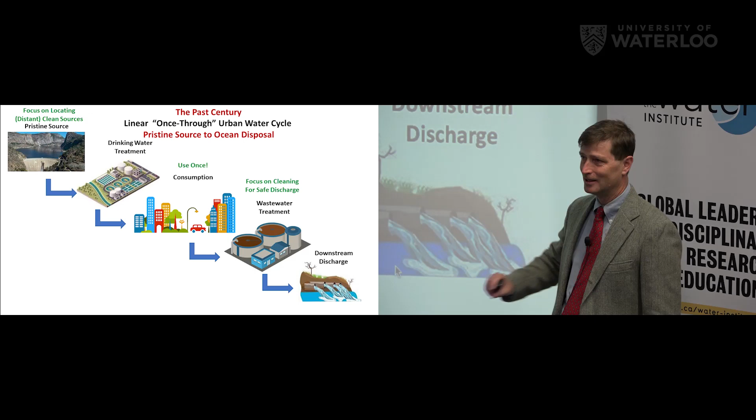Why do we need to change? Well, it turns out that this practice of importing water from distant sources is very energy intensive. On US average, it's about 0.3 kilowatt hours per cubic meter to move water from these sources to the drinking water treatment plant. The drinking water treatment process itself is very low on energy usage, and a lot of the additional energy goes into pumping this water through the distribution system out to people's houses. So actually the transport cost is what matters most, not so much the treatment cost.

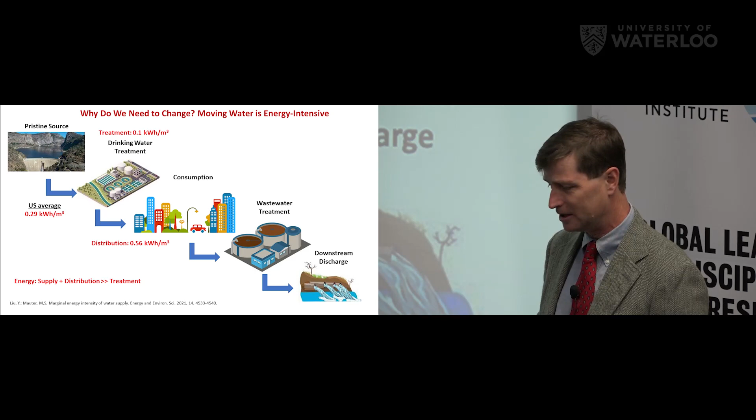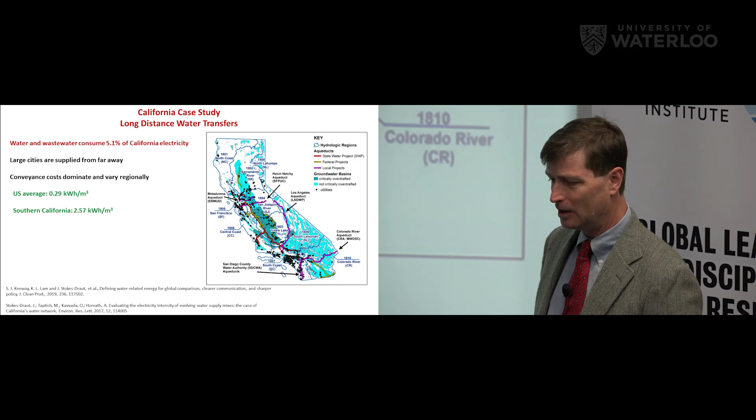Now that's on average, as I mentioned, about 0.3 kilowatt hours per cubic meter, but if we think about areas like California, it's much more extreme. Here is a map of California. About half the population in California lives down in the LA and San Diego area. And here we import water from very distant sources, shown here in these purple lines, bringing in water from the Owens River Valley, also the California Aqueduct, and the Colorado River Aqueduct. If we think about the average cost of bringing water to LA, it's about an order of magnitude higher. So pumping these waters down into the LA basin is very expensive.

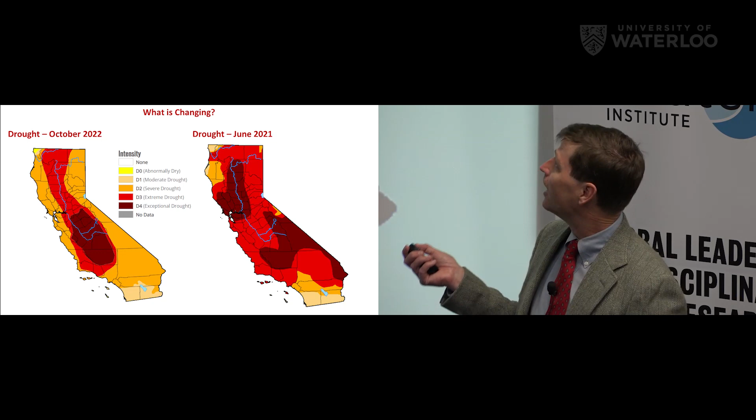What else is changing? Well, the climate's changing, and it used to be that drought was an abnormal happening. It's now routine. 7 of the past 10 years in California have been drought years. So at what point is that an exception rather than the rule? Just showing current practice, and last year you can see these areas of exceptional drought, these very dark blobs on the map. What are the consequences of that? Well, obviously, from a water supply perspective, there are consequences.

So there's impacts on water supply, but also other impacts throughout society. One is power, electrical power. A lot of our power in California comes from hydroelectric, so if your dam's not full, you're also not generating a lot of power.

And California is a big agricultural state, so a lot of the water in California is used for irrigating crops, and most of the interesting things grown in the US are grown in California - lettuce, tomatoes, that sort of thing, rather than just corn and soybeans.

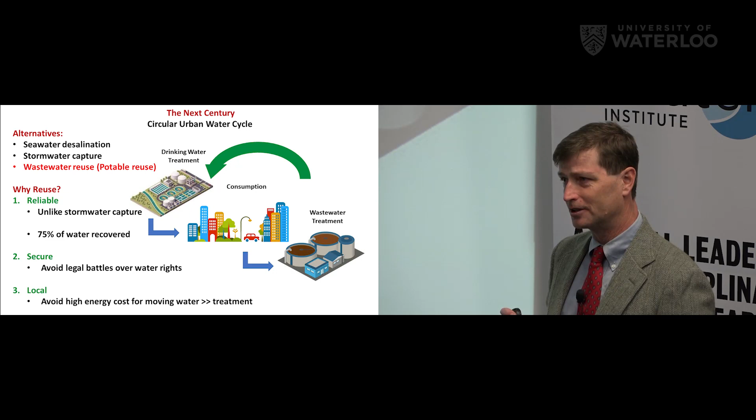So maybe instead of importing an unreliable source of pristine water long distances to get it to drinking water treatment plants, maybe we could reuse the water within the system. And so when we think about trying to expand water supplies, the press tends to focus on seawater desalination.

Some of the other options are stormwater capture - that means capturing the runoff that hits cities and cleaning it up as a water supply. But what I'm going to focus on today is wastewater reuse, and particularly potable reuse.

So why reuse? Well, there's a bunch of reasons. Number one, it's a reliable supply. Stormwater capture sounds good, but the whole reason we're thinking about these practices is because it's not raining anymore, so that's an unreliable supply.

And if we think about what goes on in a city, about 75% of the water that goes into a house ends up in the sewer. So it's about flow matched with what we need.

It's secure from a legal point of view. A lot of what goes on in California are fights between cities and states over who owns access to water. Well, this is your water - it's your sewage, so you have access to that water.

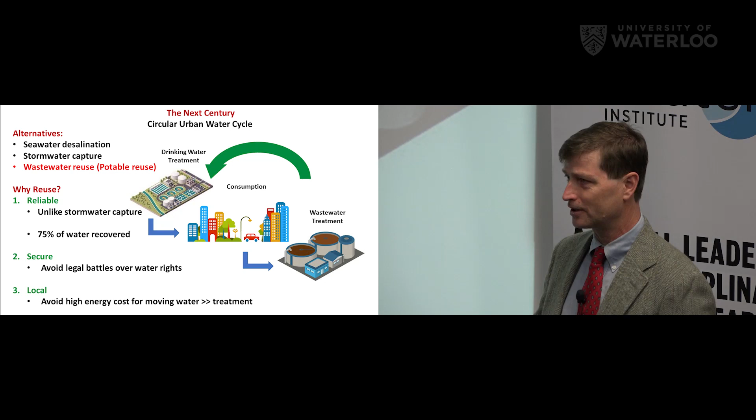And three, it's local. So again, hearkening back to the previous slides, the energy intensity of pumping water from distant sources - this water is already in your watershed or sewer shed.

There's also some win-win scenarios here. So for a variety of reasons, regulatory drivers are pushing wastewater treatment plants to put in additional treatment to remove things like nutrients to prevent eutrophication. And there's discussion now about adding removal of perfluorinated contaminants from municipal wastewater. So with these kind of drivers to put in additional treatment to the wastewater before you discharge it to an ecosystem, as long as you're doing that additional treatment, why not turn it into a water supply?

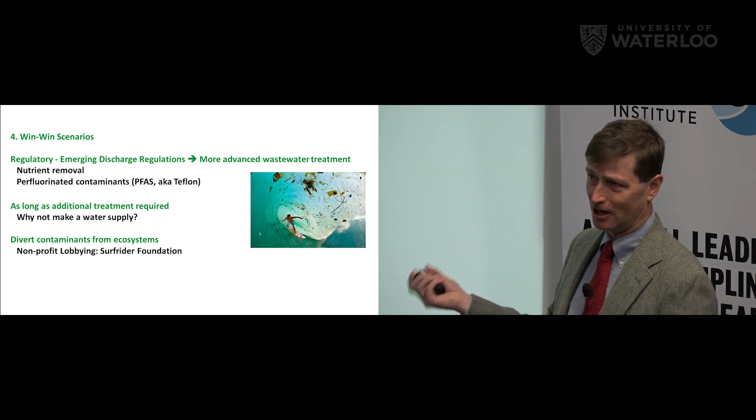And so here they're showing kind of garbage, but there are also concerns about pathogens and contaminants that they're surfing in, essentially. So diverting these contaminants away from discharge to receiving waters can be perceived as a win-win scenario, beyond just access to water, but also for enhancing the quality of ecosystems.

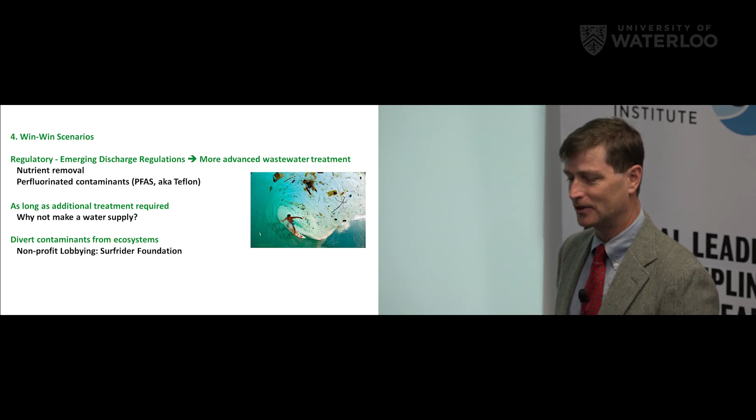So wastewater reuse is one thing. Why potable reuse? Why don't we just use it to irrigate things like golf courses rather than turning it into a drinking water supply? And so we do have non-potable reuse systems throughout California.

They typically paint the pipes purple to alert people that it's not drinking water quality, so we often refer to it as purple pipe systems. But the challenge is you need a separate distribution system, these purple pipes, and that's very expensive to install.

That's putting pipes in the ground, digging up streets - it's millions of dollars a mile. And so that can dwarf the cost of the additional treatment required to convert this low quality water into a drinking water supply. So why not go all the way to a drinking water supply where you gain flexibility in terms of the use?

So they do have these distribution systems, but they tend to cart the water out to high volume users - golf courses, nurseries, and that sort of thing. To expand beyond this to, say, pipe out to people's houses for irrigating their lawns becomes much more expensive than it's worth.

So what's the central challenge? If we go for converting this wastewater supply, wastewater source into a drinking water supply, what's the central challenge? The central challenge is all the contaminants.

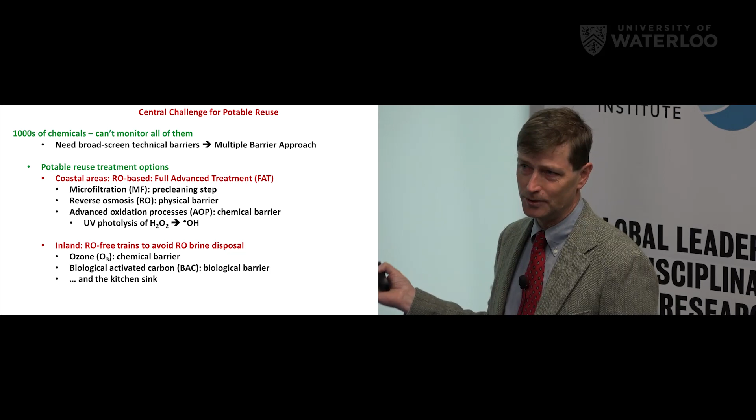The heart of the process is reverse osmosis, a broad screen physical filtration barrier that ideally squeezes out everything but the water. Some things slip through, and so we follow it with something called an advanced oxidation process that basically generates radicals that ideally go after anything that could conceivably slip through the membrane. Typically it's ultraviolet photolysis of hydrogen peroxide to make this radical.

In inland areas like Colorado, Arizona, those sorts of areas, they try to avoid reverse osmosis because part of the challenge is everything that's squeezed out of the water has to go someplace. Disposing of those salts and contaminants in inland areas is problematic. Are you going to dump it in the river? Then it's going to float downstream to the next user.

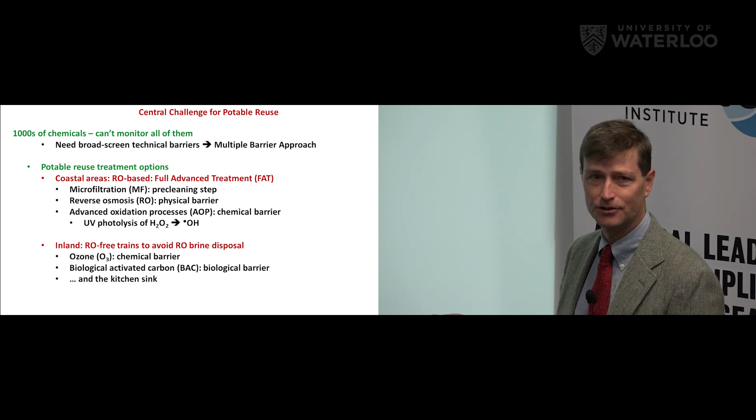So instead, they try to avoid these membrane-based systems and use other barriers, such as ozone, kind of a broad screen chemical barrier, followed by biological activated carbon. So hopefully the microorganisms are eating whatever's left in that water.

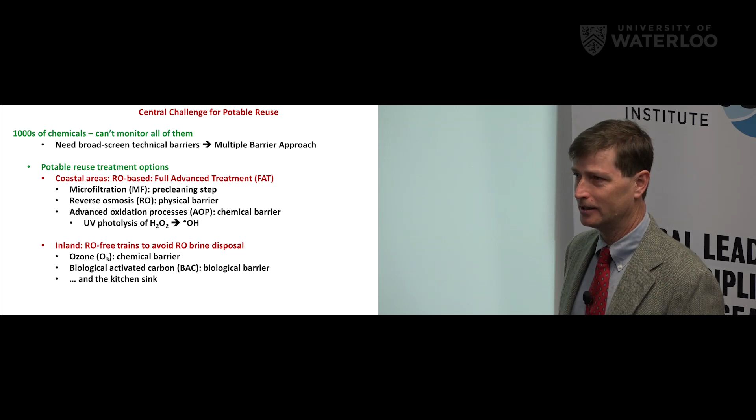But I put down here 'and the kitchen sink,' because one of the first of these types of systems is actually in Namibia in southern Africa in the 60s. It's an inland area, and one of the challenges they had is that it's a desert, so evaporation far exceeds the rainfall. So they started mining the sewage essentially as a water supply.

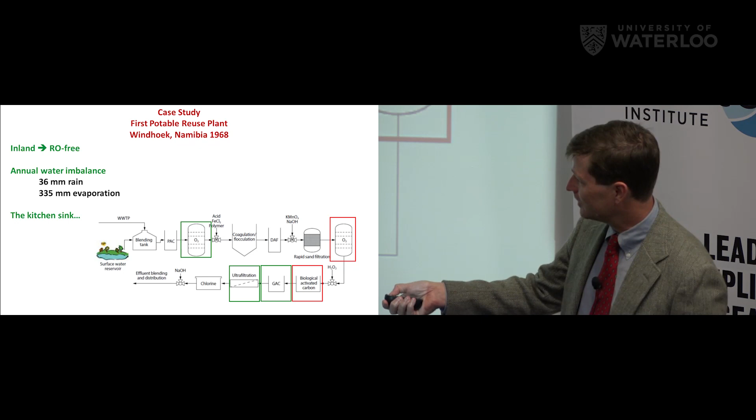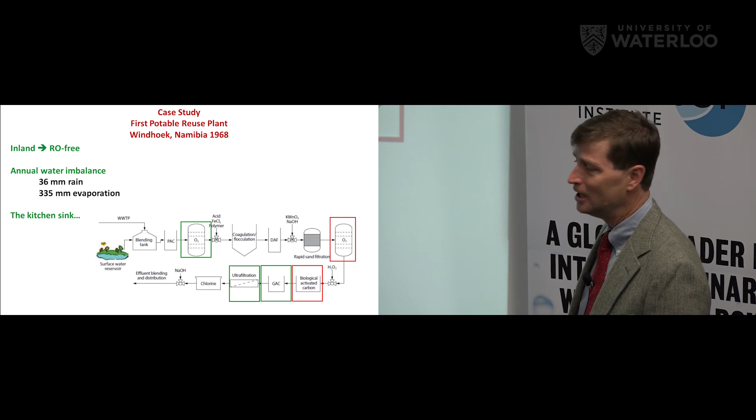So indeed, here you have some surface water, but they're blending it with wastewater, and it goes through this treatment train. You see the essence of what these inland areas in the US use: ozone and biological activated carbon. But they tack on many other treatment processes to hopefully knock back all the contaminants. So ozone's applied here, activated carbon, ultrafiltration, and many other processes as well.

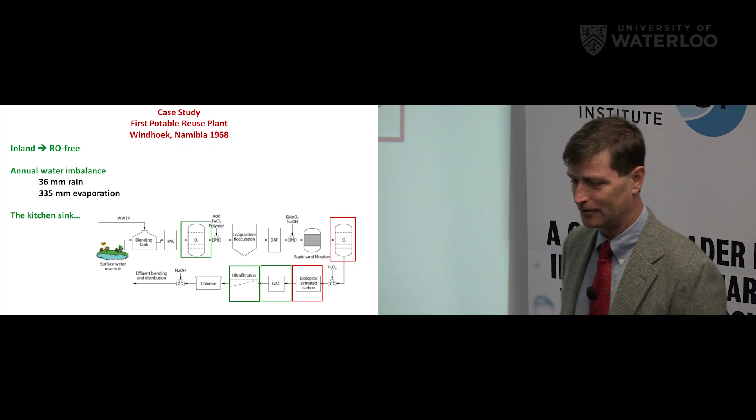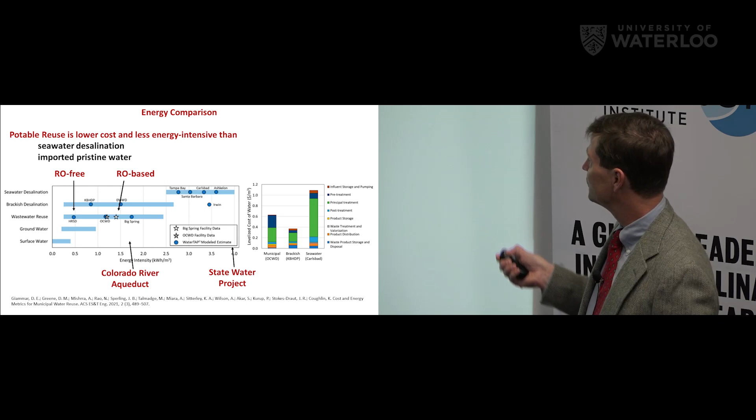So when we think about what Southern California is looking into, it's mostly these wastewater reuse systems. Orange County has the oldest one in the US since the 1970s, and also the largest system in the US at about 130 million gallons a day.

Los Angeles announced a Green New Deal where by 2035 they hope to recycle 100% of their municipal wastewater, and to the extent possible through potable reuse rather than non-potable. San Diego is also looking at generating about a third of their supply from potable reuse within the next less than 15 years at this point.

All right, but then the question becomes, is it safe? Certainly there's problems because of its sewage origin. People don't want to drink toilet water.

Back in the 1990s, San Diego first tried to recycle wastewater as a potable supply, and they got well through into the design process, and then the press got a hold of it with pictures like this, and that was the end of it.

With droughts arising and people getting used to the Orange County system, it's now back in play, and they're implementing or constructing some of these reuse systems in San Diego.

How do we know that it's safe? Part of the problem is, as we mentioned, we have thousands of chemicals. What do we monitor, and which ones matter? When do we say we're done? That's the key one—you'll always find something in water. How do we know it's safe enough? Because if we keep adding barriers, we ramp up the expense, maybe for no meaningful benefit.

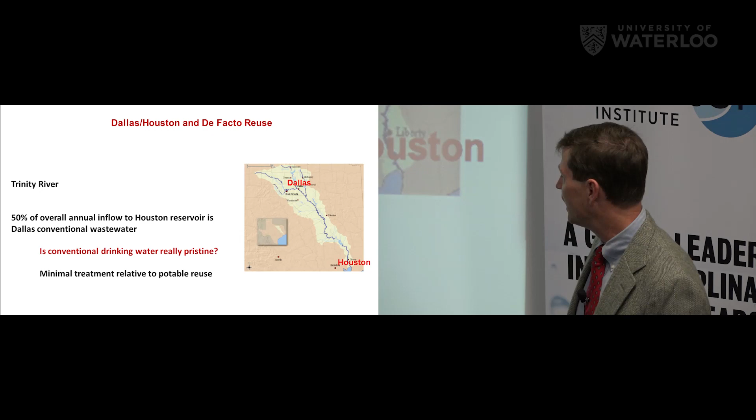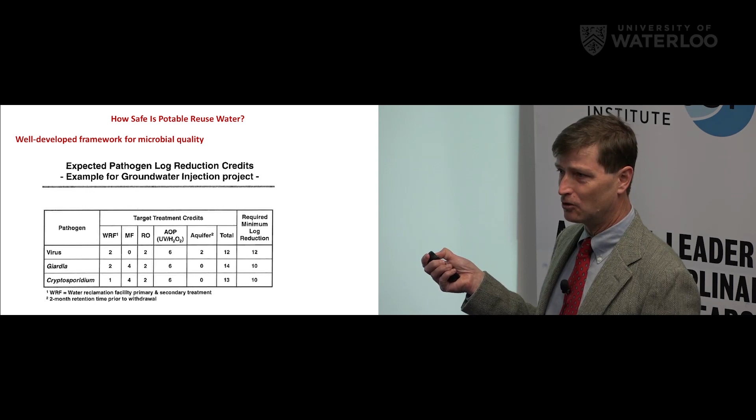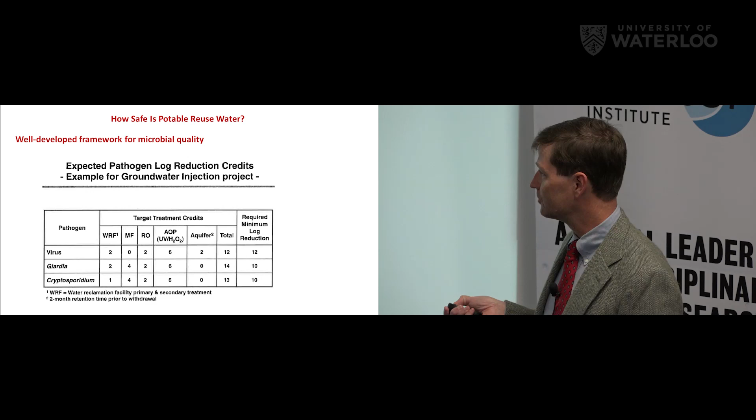When we think about potable reuse, there's a well-developed regulatory framework for microbial quality in California. Reuse systems are required to demonstrate 12-log removal of virus and 10-log removal of things like Giardia and Cryptosporidium, and they have to validate through regulators how they achieve this through the treatment train. They can accumulate log removals across the treatment train. So this is a fairly well-developed framework.

Chemicals are more difficult because there are so many, and we can't possibly monitor them all. The public is focused on pharmaceuticals. Regulators focus on different chemicals—they tend to focus on industrial solvents like trichloroethylene, 1,4-dioxane, and various disinfection byproducts such as NDMA.

One of the reasons why—this is a table from a National Academy report looking at potable reuse and different scenarios of reuse systems from a margin of safety factor. A high margin of safety means you're nowhere near a level of public health concern at the concentrations detected in reuse waters. So what do we see? Pharmaceuticals are in the millions.

The chemicals at low margins of safety are things like NDMA, which is a disinfection byproduct but also shows up for other reasons, along with various byproducts of disinfection—trihalomethanes, haloacetic acids, and other unregulated contaminants. There's other chemicals as well; the ones that tend to show up of potential concern are perfluorinated compounds.

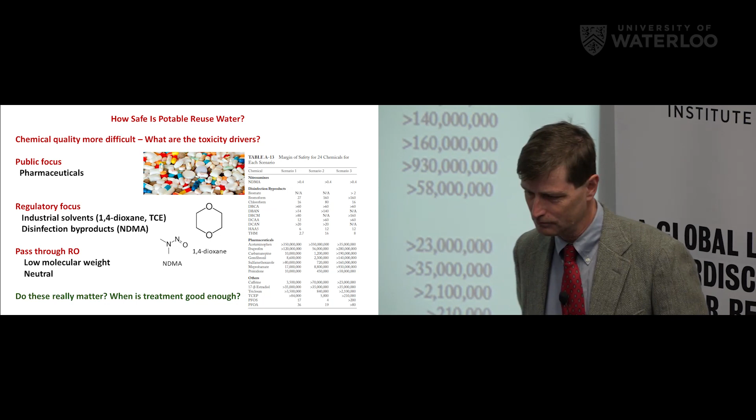So we started doing a study looking at the concept of de facto reuse—your conventional water supplies are often impacted by upstream wastewater discharges, and they are going to have contaminants in them. So how do we know? There's a lot more scrutiny on the intentional potable reuse systems. How do we know when the treatment's good enough? So we thought, let's just compare the quality of conventional drinking waters to potable reuse waters.

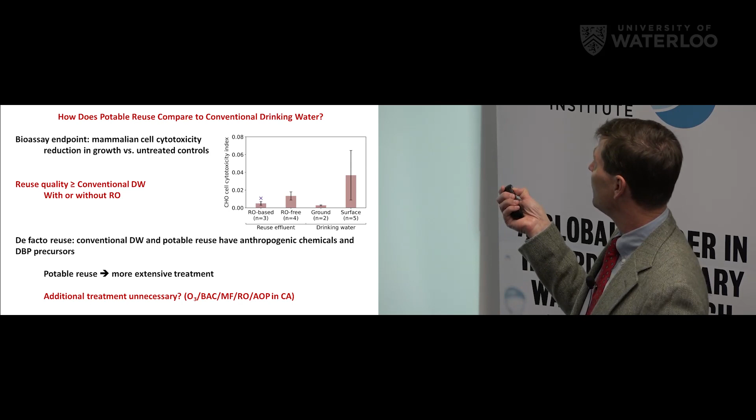What we did was apply bioassays—mammalian cell cytotoxicity. Cytotoxicity is a broad screen metric; it basically means your cells aren't growing as fast as they could have, so many different modes of toxicity could contribute to that. What we see for different reuse systems, both RO-based, like the California model, or RO-free systems, is they can be of higher quality than conventional surface waters, and in some cases comparable to groundwater systems.

So why are there contaminants here? Again, it comes back to the idea that we have upstream wastewater discharges in a lot of our drinking water supplies. And even if you don't, you're disinfecting that water and making disinfection byproducts just from reactions of chlorine with natural organic matter. So potable reuse, because it has much more extensive treatment, can reduce those contaminant concentrations.

I think one of the reasons this is important is these discussions right now, where I'm not so sure California has good rationale for tacking together all these treatment processes, other than a knee-jerk reaction that more treatment is better. But it also drives up the cost.

So what are the toxicity drivers? This is a little bit of a diversion, but with the same study, we've also been looking at what chemicals might matter.

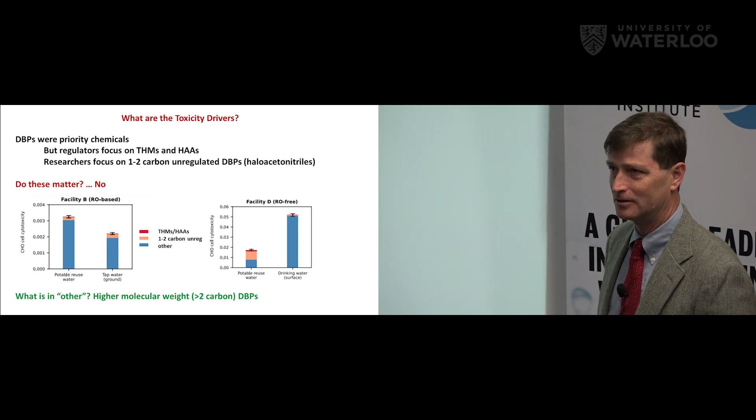As I mentioned, byproducts were priority chemicals from that margin of safety calculation. Regulators tend to focus on two classes, trihalomethanes and haloacetic acids. Researchers in the DBP field tend to focus on unregulated but small molecule DBPs like haloacetonitriles.

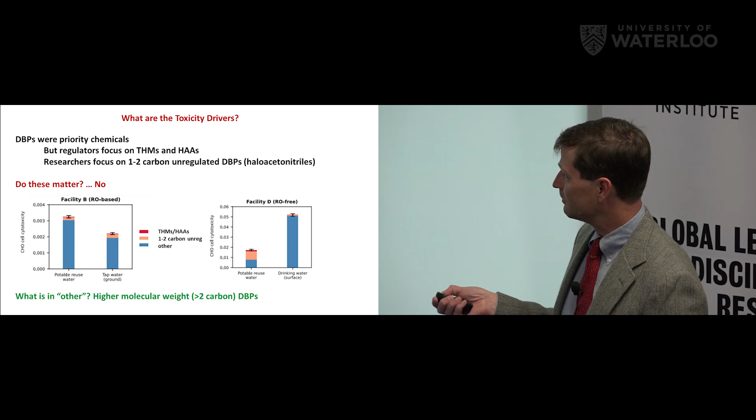So we looked at two of the studies we were examining for that previous work, and what constitutes cytotoxicity. We looked at the regulateds, the unregulateds, and the other category. What we see is frequently the other category dominates.

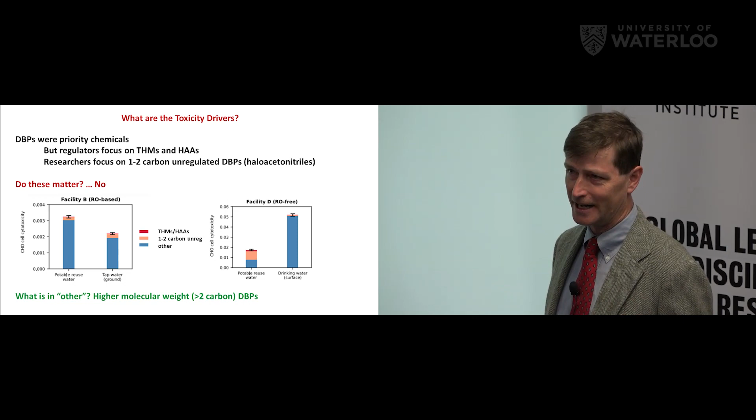So what's in that other category? Well, right now it's pretty poorly defined. It's presumably higher molecular weight materials. So we started to look at what could contribute to the other pile. There are kind of two thoughts.

Ultimately, organic matter, the precursors for DBPs, comes from organic matter shed from things like leaves, algae, bacteria, and watersheds, made up of biomolecules. A lot of the focus has been on things like lignin, structural polymers in wood, that degrade in water supplies into what we call humic substances, poorly defined but containing aromatic groups. The thought is that disinfectants react with these, break these bonds, and liberate aromatic products that can then be halogenated. Ultimately, these break down to these one to two carbon DBPs.

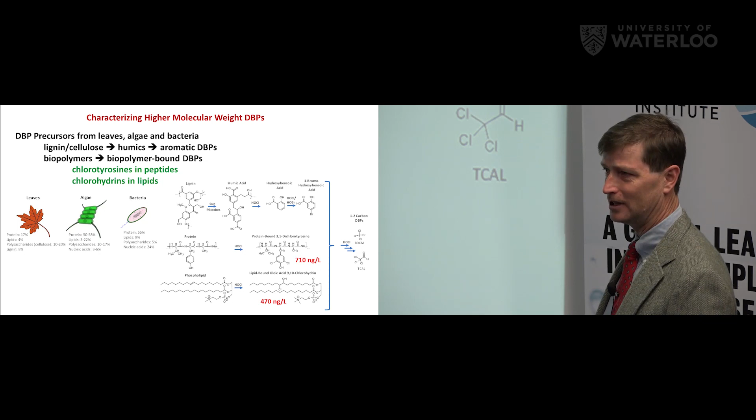So some people are looking at these. What we've been looking at is that all cells also contain other biopolymers like proteins and lipids. These can react with chlorine, so we should be able to form the associated byproducts. Tyrosine can form chlorotyrosines, and alkenes and fatty acids like oleic acid can form chlorohydrins. Indeed, looking at those same samples we examined before for cytotoxicity, we find these compounds out there.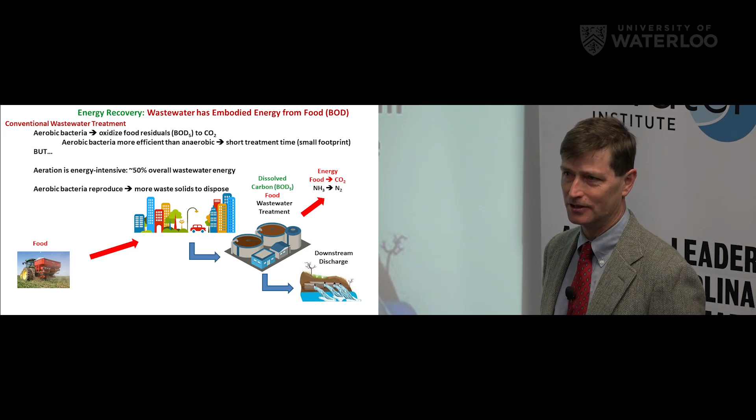All right, so we can extract water, and that's happening at full scale with lots of plans going on in Southern California to expand the scale of that. What else can we extract from water?

Well, one thing we can think about is that food, through poo essentially, ends up in the wastewater plant as dissolved organic carbon that exerts biological oxygen demand. Currently, we put in a lot of energy through activated sludge systems to supply oxygen to burn these organics to CO2. Do we need to be adding so much energy? It can be a lot - about 50% of wastewater treatment energy is associated with that aeration step.

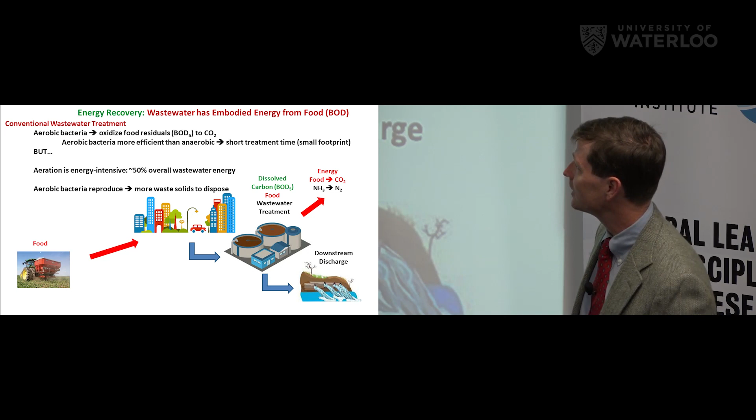So one of the alternative options is to try anaerobic treatment. Ferment the dissolved organics and generate methane that you can capture for energy. We do this for biosolids, but can we do it for the dissolved organics in the mainstream treatment process?

Anaerobic bacteria are much less efficient than activated sludge aerobic bacteria. Traditionally people said this can't be done because you need to hold the water, just like for anaerobic digestion, for days since these organisms are too slow.

So we've been looking at a pilot scale treatment shown here in Redwood City. It's about 30,000 gallons per day, consisting of this process where we're fluidizing a bed of activated carbon and growing a biofilm of anaerobic bacteria on it. The heart of the process is essentially growing such a thick biofilm that you're making up for their inefficiency by having that many more mouths eating the food.

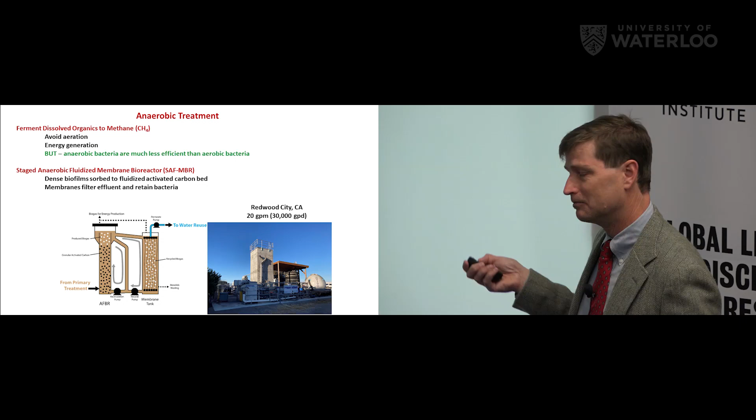I forgot to mention, this is also a membrane bioreactor, so it has ultrafiltration on the back, meeting TSS standards easily. Overall, the residence time is about 5 hours. That compares well with traditional activated sludge treatment, where you might have 6 to 8 hours in the aeration basin, followed by an hour or so in the clarifiers. So we're actually achieving lower time overall to reach the same standards.

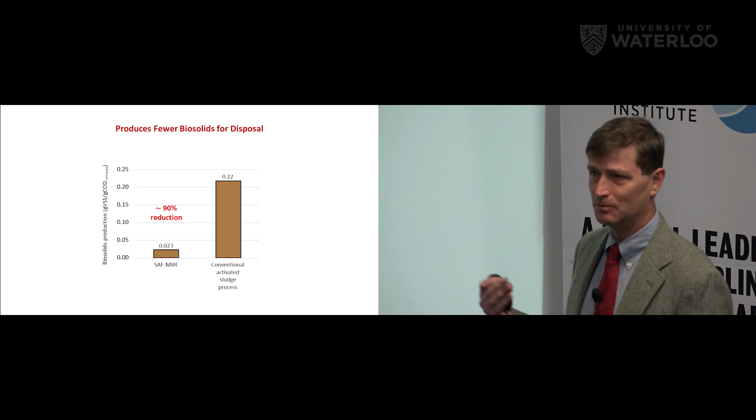And because it's lower overall time, we can shrink the footprint of the plant. We also produce fewer biosolids. Why? Activated sludge bacteria get a lot more energy per chunk of food, so they multiply more and make more waste cells that have to be disposed of. With anaerobic bacteria, that's not the case, and for solids generated by the secondary process, we get a 90% reduction. Biosolids are a major cost to wastewater treatment processes, so we can shrink that part of the facility as well.

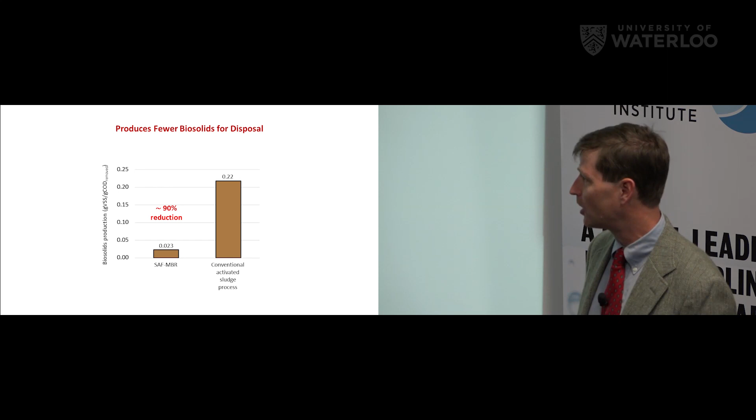So why this matters, particularly in areas like the Bay, is that land is ridiculously expensive. Here's the Redwood City facility right by the bay shore - here's their existing plant. If we put in one of these anaerobic systems, by saving on things like avoiding secondary clarifiers and reducing the size of the digesters because we're generating fewer biosolids, we could free up this amount of space. This is valuable because cities like Redwood City want to do reuse systems, but they don't have the land to put in the RO membranes and other things they need. So we're gaining back land by switching to this type of process.

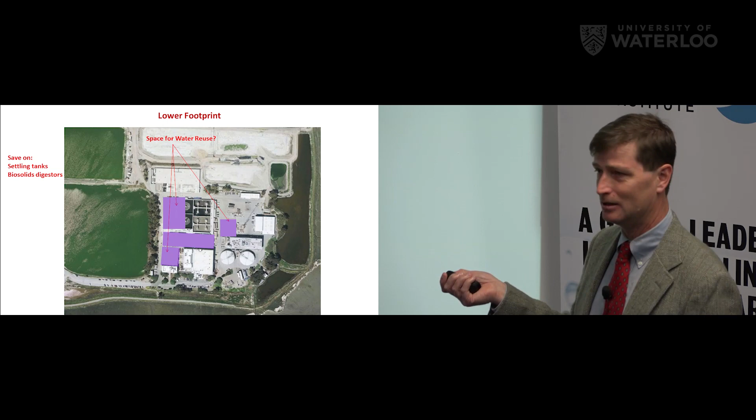We also looked at energy use. Here's the energy consumption. We're avoiding aeration, so it's very low. Here's the net energy production if we capture the methane and turn it into electricity. So it's the first potential energy-positive system as a wastewater treatment plant.

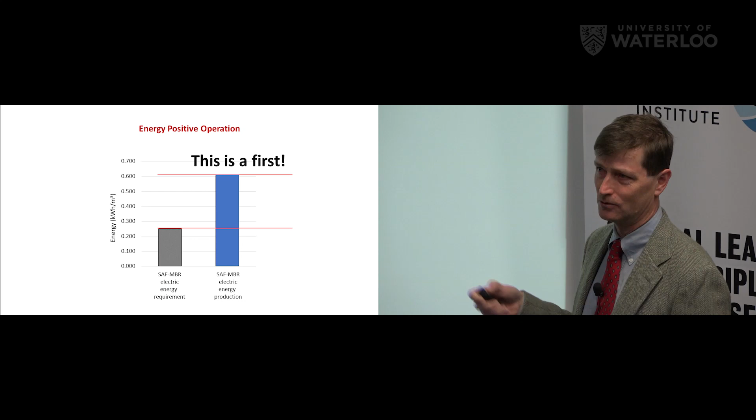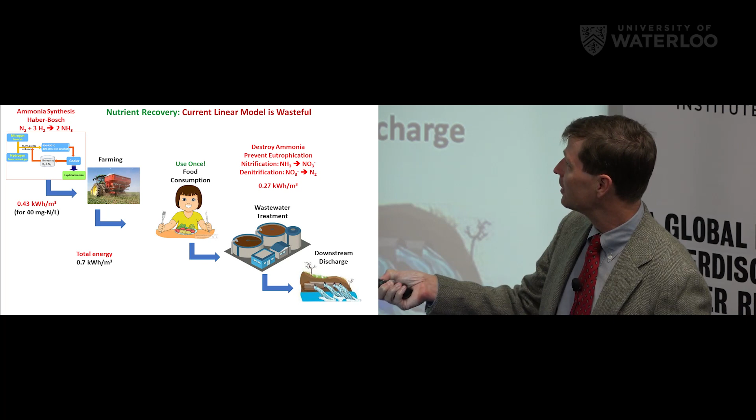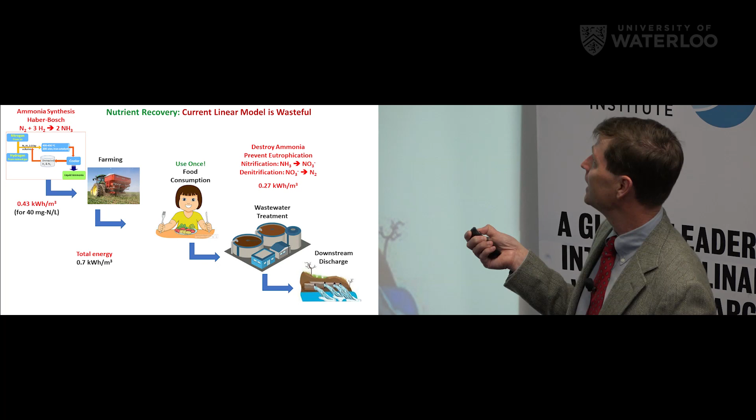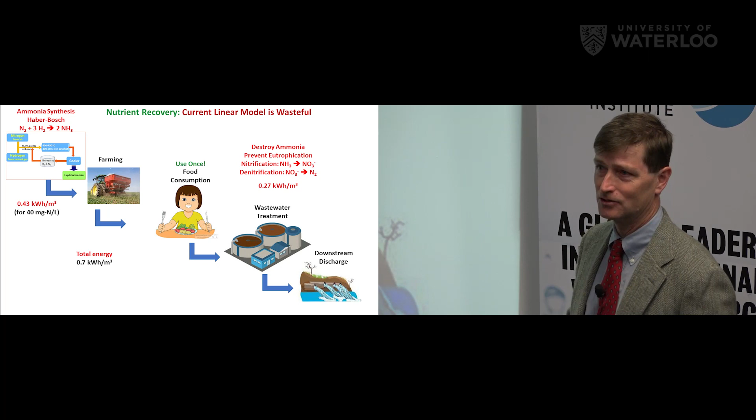Okay, so we talked about extracting water, extracting energy at pilot scale. What about extracting nutrients? Currently we need nutrients for farming, and we generate it by taking nitrogen gas and putting in a lot of energy to generate ammonia, a substantial amount of energy. Use it once, it goes through the wastewater treatment plant, and in many areas there's a motivation to remove that nutrient through nitrification, denitrification, converting that ammonia ultimately back into nitrogen gas, but that's also very energy intensive. So put the two together and we get a lot of energy in just to use that ammonia once and then throw it out, essentially. So could we capture it and reuse it in some fashion?

This is only at lab scale, but one convenient thing about using an energy-intensive process like reverse osmosis is that it screens out a lot of molecules, particularly charged molecules. If we think about ammonia, with a pKa of 9.3 at pH 7 or thereabouts for wastewater, it's predominantly in the charged form. RO is very good at removing charged compounds, which is why it can remove salts. It can also remove ammonium, so the ammonia gets rejected in the RO concentrate. By extracting the water, we're also getting a freebie by concentrating the ammonia and making it easier to capture and reuse.

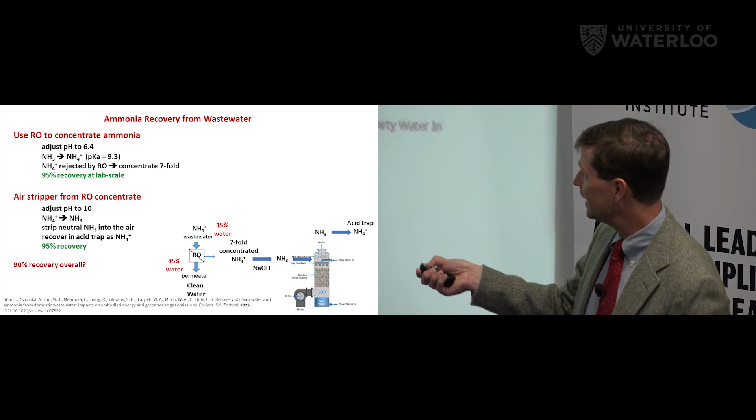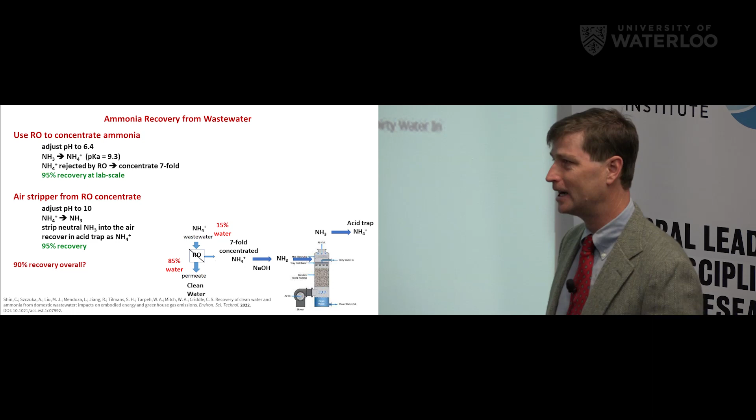How could we do that? The wastewater comes in, the ammonia is rejected into a lower volume of the influent water, and then we can take that and run it through an air stripper and capture it in an acid bath to further concentrate that ammonia for reuse. We've looked at that process at lab scale, and you can get about 90% recovery through that type of process.

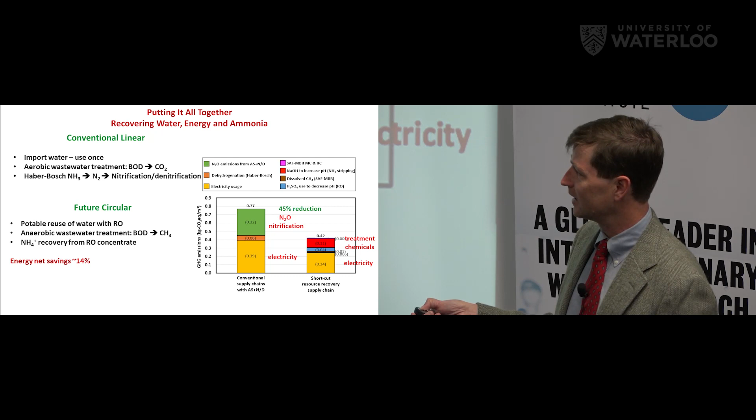So putting it all together and comparing our current conventional linear system, where we import water often from distant sources, use it once, put in a lot of energy for aerobic activated sludge type processes to burn the dissolved organics to CO2, generate ammonia from nitrogen gas using this energy-intensive process, use it for farming, and then get rid of it through nitrification and denitrification, versus a future circular system where we extract water through potable reuse using RO membranes, do anaerobic wastewater treatment to ferment the organics to methane for energy capture, and extract ammonia from the RO concentrate.

We can look at it from a net energy savings perspective. The net energy savings isn't huge, but about 14%. We can also think about greenhouse gas emissions between the two systems, and we get about a 45% reduction. Where are the greenhouse gases coming from? N2O comes from nitrification and denitrification type processes, and we're also reducing electricity usage by avoiding that energy-intensive aeration step. There is some greater use of treatment chemicals for things like the acid bath and the air stripping system.

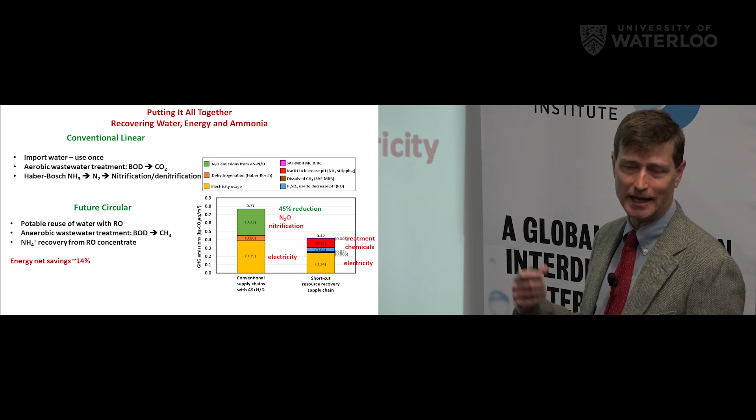So it sounds pretty good overall, but are there challenges? Yes, there are. One of the key challenges for these anaerobic wastewater systems in particular is generation of sulfides. Before you get to fermenting the organics to methane, you'll have biological sulfate reduction, which will generate hydrogen sulfide, and this can be substantial.

In Redwood City, we get seasonal variations in sulfate concentrations due to different levels of the bay, essentially, and seawater intrusion into the sewers, up to a millimolar sulfate. That can be converted into a millimolar hydrogen sulfide. Hydrogen sulfide is bad for several reasons. It smells like a rotten egg, so nobody wants to use your water. But probably more importantly, it hinders disinfection—there's a huge chlorine demand, and the UV absorbance by sulfides is also potent. So your two main ways of disinfecting wastewater are out the window.

If we wanted to get rid of the sulfides, one of the conventional ways is adding chlorine. But it's about a 4-to-1 stoichiometry, and when we play that out with the millimolar sulfide, what we're getting is 280 milligrams per liter chlorine. That's huge, way more than you'd ever apply to even disinfect wastewater.

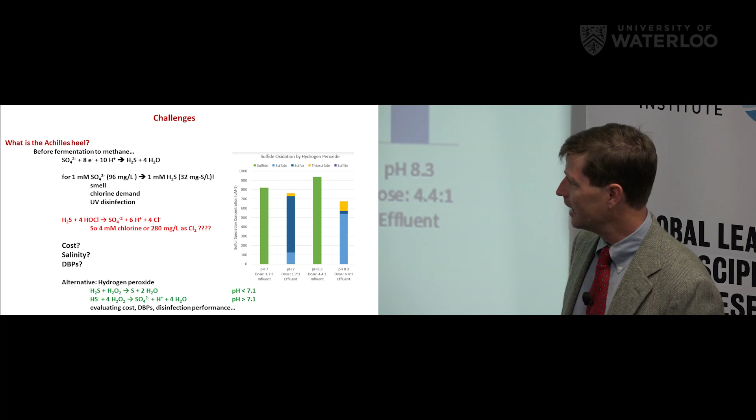So chlorine treatment is prohibitively expensive. It also adds to salinity because we're adding a ton of chlorine, which ultimately becomes chloride. That could be difficult, particularly for inland areas where your chloride would wash downstream to the next user. And if you're adding this much chlorine, you're probably making a bunch of toxic carcinogenic byproducts.

So an alternative we're looking at is hydrogen peroxide. It's about half the cost of chlorine, and it can operate in the following ways. It has a pH dependence where it reacts with H2S to make elemental sulfur, and it reacts with HS- to form sulfate. The stoichiometry is different, so you need about 4 times as much for this scenario. The pKa is right around where we operate, so small pH adjustments can affect which way the reaction goes.

Here, you're using less hydrogen peroxide, but you make elemental sulfur, and that water turns milky white, so any downstream filtration process will have to deal with that elemental mud you're making. Here, you're making a dissolved compound instead, so that's okay, but the problem is you pay more.

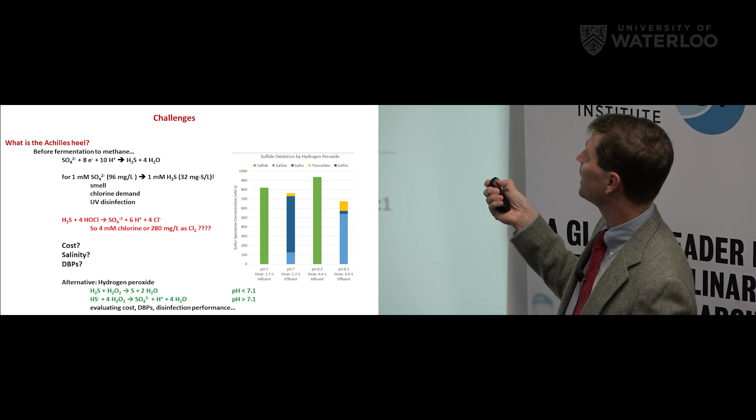So we're doing pilot tests right now where sulfide coming in is micromolar, almost millimolar, in the 2 cases, operating at pH 7 or 8.3. When we use hydrogen peroxide here, we can get away with a lower dose because we're operating at low pH, in this regime, but again we make a lot of elemental sulfur. At the higher pH, we're down here, and we make less elemental sulfur, but we make things like sulfate and thiosulfate—more oxidized products.

Kind of getting towards the end here, one of the things we're also looking at is improving the energy efficiency of other components of the reuse train. Most attention for potable reuse trains in terms of optimizing processes goes into optimizing membranes—making more efficient membrane materials, RO and MF membranes, anti-fouling, that sort of thing. But it's kind of reaching diminishing returns; there haven't been substantial improvements over the past few decades in these membrane systems. So what about other components of the reuse train? Less attention has focused there.

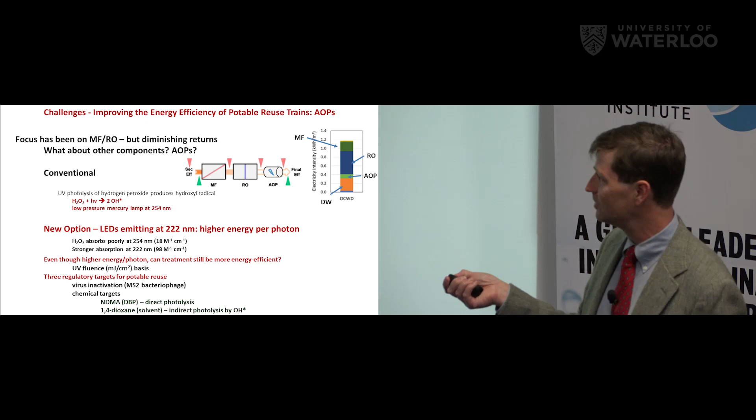Nowadays, there's interest in other kinds of light-emitting diode-type lamps that can emit at different wavelengths. We've been looking at these higher energy, lower wavelength photons, 222 nanometers. The benefit is hydrogen peroxide absorbs more strongly at this lower wavelength, so we can potentially have a more efficient system for photolysis of the hydrogen peroxide to make these radicals. So the question is, even though we're using higher energy per photon, if the photon is more efficiently absorbed, do we still come out ahead?

We can look at things on a fluence basis, units for UV dose, millijoules per centimeter squared, which already incorporates that energy component. What do people care about? For regulatory oversight, they care about viral inactivation, that log removal. We tend to spike waters with MS2 bacteriophage, a non-pathogenic model you can use to validate viral removal. For chemical targets, the targets for regulators tend to be NDMA, a disinfection byproduct which is removed by direct photolysis, and 1,4-dioxane, an industrial solvent that's taken care of by our hydroxyl radical.

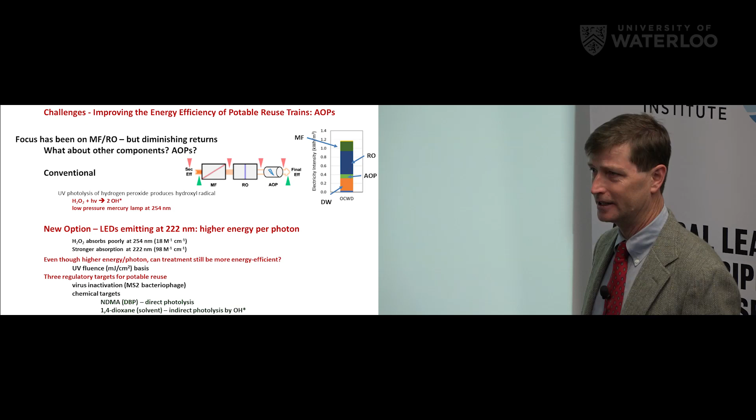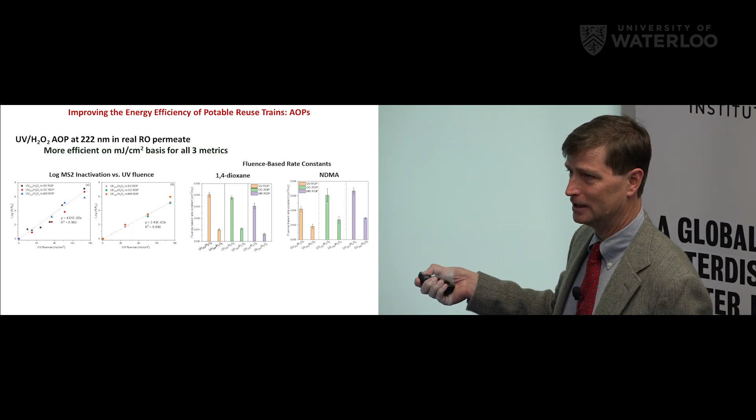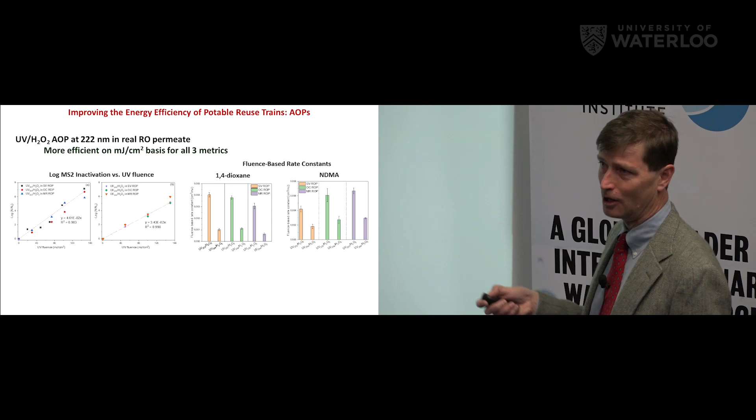So here's what we see with 3 different full-scale reverse osmosis permeates at California potable reuse systems. On the viral inactivation side, we're looking at UV dose versus log removal, and what we see is that 222 nanometer is about 30% more efficient than the traditional 254. Looking at fluence-based rate constants at these different RO permeates—how fast you degrade the chemical 1,4-dioxane or NDMA by 222 versus 254 nanometers—in all 3 RO permeate systems, 222 is about 3-fold more efficient than conventional 254 nanometer. For NDMA, it's maybe a factor of 2 more efficient. But in all 3 cases, we come out ahead just by switching the bulb.

Our conventional systems are a once-use linear system that tends to be very energy intensive. We use a lot of energy to import water, pump it from distant sources, and a lot of energy to synthesize ammonia to make fertilizer for growing food. Then after we use it, we put in a lot of energy to clean the water using activated sludge systems, and to try to remove the ammonia through nitrification and denitrification processes. In a future scenario, maybe we can look at sewage as a system to mine for resources in a circular water system.

So we can mine it for 3 types of resources: water, latent energy from the dissolved organics, and the ammonia that's present in there. We saw that we could potentially reduce the energy use of the entire water cycle by about 15% and greenhouse gases by almost 50%.

Some of the other benefits are that we gain water security - we're not as subject to whether or not it rains. When it does rain, we can leave that water for ecosystems instead of piping it to distant cities. And we can reduce the contaminants associated with conventional wastewater discharges by diverting them from the discharge itself.

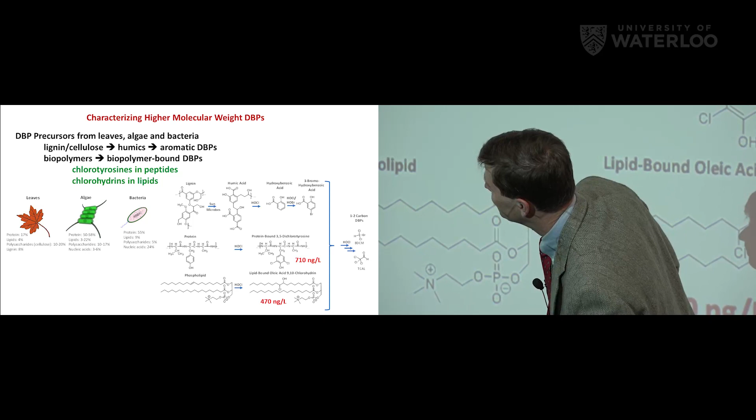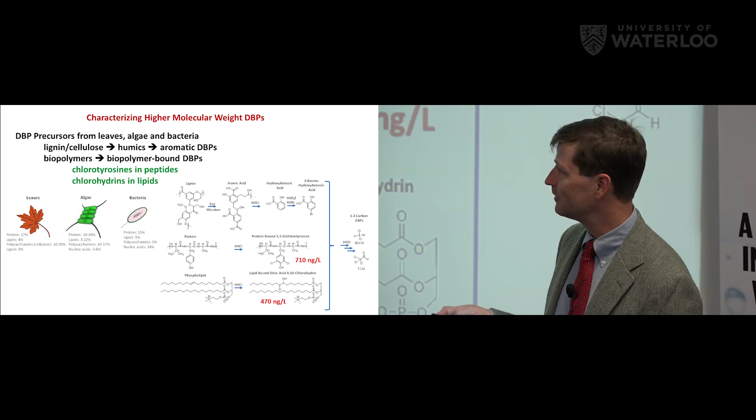Well, I did put down cellulose, but there's other things in there, such as nucleic acids that I didn't put down - all cells have that. So yeah, it doesn't add up. I also got the numbers for leaves, and it was surprisingly difficult to find these numbers. You would think it would be in a botany book, but no. They vary a lot depending on what type of leaf you have. Most of the information out there is actually for crops, which kind of makes sense, but I was trying to find things like maple leaves and pine needles - surprisingly difficult to find. Okay, thank you so much.

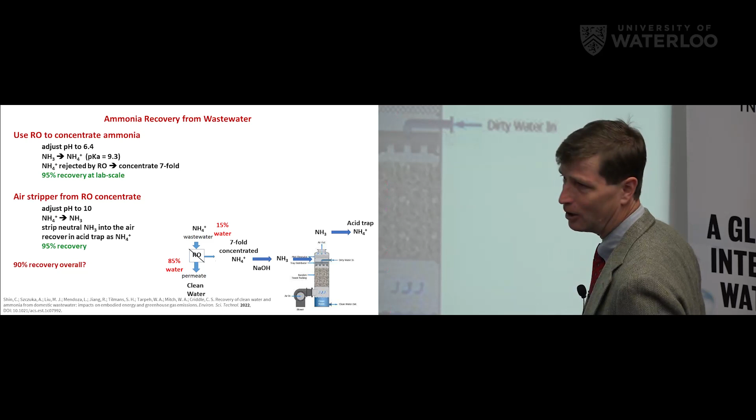So basically I was thinking, when you remove all that, what happens to downstream ecosystems when you rip out all those nutrients? Oh, well, that's a good question. In this circular system, ideally the benefit is - like right now, where does San Francisco get its water? Hetch Hetchy, Yosemite National Park essentially, there's a dam. If we did 100% wastewater recycling, we probably wouldn't eliminate the imported water, but we could substantially reduce it and potentially just use local groundwater even. In that case, that water could be reverted back to a natural river.

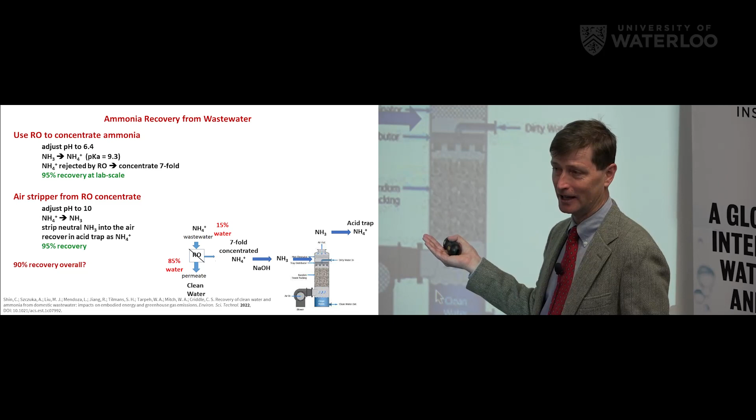There's actually a lot of fights going on now in California, with mandates by the state government saying you have to maintain a minimal level of discharge in the rivers. They're targeting about 40% of the base flows of the San Joaquin River, which covers about half of the Central Valley of California. So a lot of these cities operating these dams are going to have to figure out a way to reduce their usage to give back these waters to the ecosystem.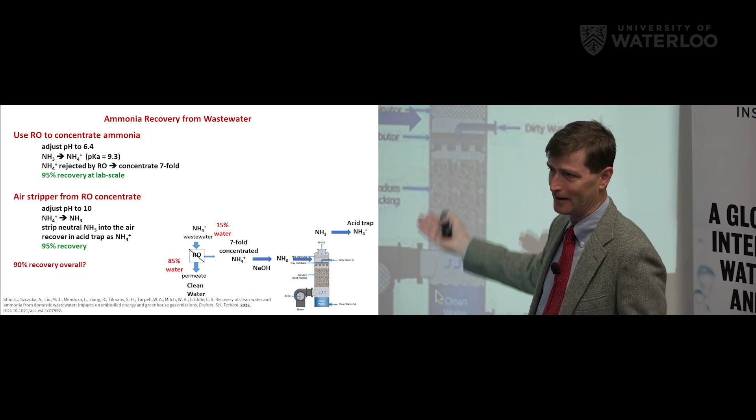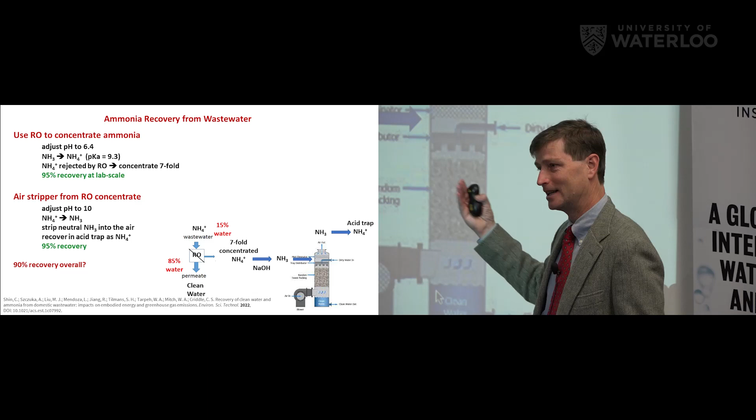Ideally, you're allowing these natural rivers to flow again into the ecosystem. From the treated water point of view, the goal is you're doing something unnatural. We're putting a lot of human waste as an overlay on top of what's in a natural water supply, and that creates imbalances, so you start generating things like algae blooms that shouldn't occur naturally, and we have to remove them. If we do something like reverse osmosis, you're generating essentially deionized water. Maybe that's too much, but we're not sending that to the ecosystem, we're sending it to us.

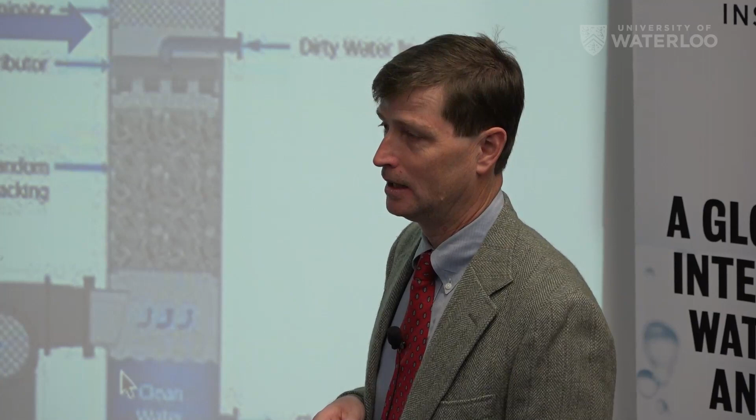Hi, I'm Bowen, a PhD student in ecohydrology. My question is about that Orange County treatment plant—I heard they actually treat the water to potable level, but inject it into the groundwater aquifer, because the public may be concerned if they use it directly. Do you think that may be a better way to make this idea more acceptable?

I'll explain some terms here. So, current systems that do potable reuse, like Orange County, clean the water up to make essentially deionized water, and then dump it back into groundwater or into reservoirs. From there it goes to a drinking water treatment plant, is treated again, and then sent out to the consumer. That's called indirect potable reuse, and part of the motivation of that is public fear.

The people who operate these systems talk about this from a sociological point of view—it breaks the link to the toilet if you see it come out of the ground. It's hard to remember that it went in from a toilet over here and then came out through the well. So what this is all about is emerging regulations for what they call direct potable reuse, where you don't have to do that anymore.

And they have different flavors. A lot of the current ones, like San Diego, are looking at what if your reservoir is just really small? So you're still dumping it in a reservoir, but it's a really small one, so you don't have more than, say, 3 days of residence time in the reservoir, and then it goes into the drinking water plant.

But what we're hoping to do with our local city is called treated water augmentation. That's the ultimate—take the scenario of San Jose. All the reservoirs are in the hills around San Jose. They flow down to the city, get used, and it all flows to the bay where the wastewater plant is and where this reuse plant will be. Under current systems, you'd have to pump it back up to the reservoir for retreatment—that's all that energy to put it back up on top of these hills.

For the second question about sodium hydroxide, let me get back to this. These treatment chemicals, these bars right here, are those chemicals. It's mostly due to the pH adjustment needed for acidification to convert it to NH4+, so it can be rejected by the RO membrane, and then the hydroxide, and then the acid to capture it again. So that's most of what those chemicals are.

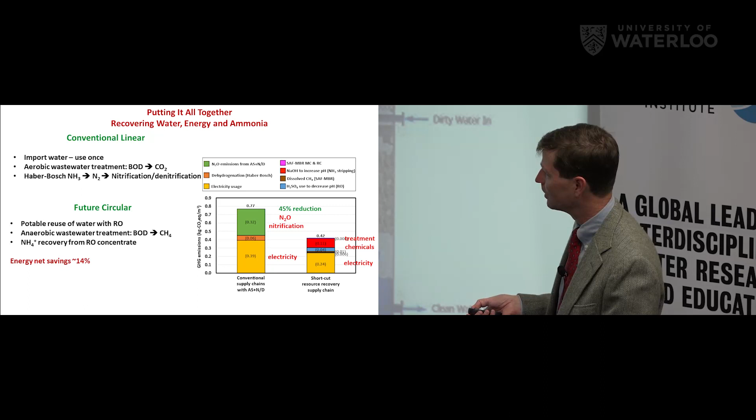So yeah, it does add to the cost, but overall we're getting a minor net benefit of the entire system from a cost point of view, but a greater benefit from a greenhouse gas point of view.

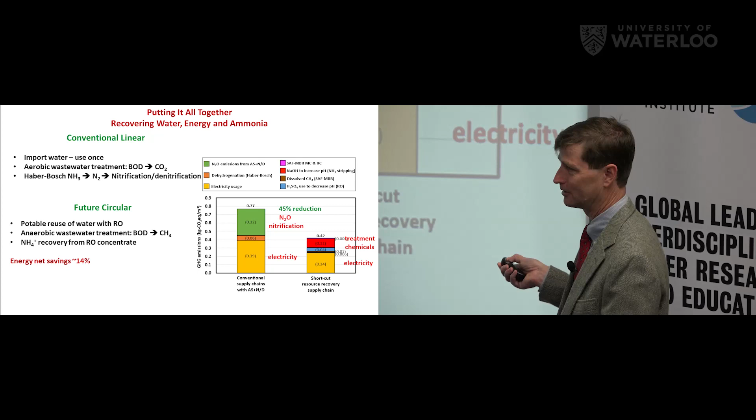You talk like an economist. I have another question here. Okay, hi, my name is Raisa, and I'm a PhD student in Earth and Environmental Sciences.

This is a great, interesting talk. My question is, one of the challenges you have in this process is refining the sulfides from the system. That reminds me of a similar challenge in petroleum mining, where sulfides get oxidized and sour the petroleum. Is the refinery process here kind of similar to that process? Can you comment on that a little bit?

Yeah, you're right that petroleum also has the same sulfide issues, and they've developed processes to recover it, often as elemental sulfur. There are mountains of these yellow piles that show up at oil refineries, and actually some of the techniques we're using are based on petroleum schemes.

For example, one of the things we're looking at is anion exchange as an alternative to air stripping, which I mentioned earlier. You get the sulfides, then further concentrate them when you regenerate the system. But what do you do with all this super concentrated hydrogen sulfide? That's where you're up near petroleum levels, though levels in petroleum are much higher than in wastewater. But once you concentrate it, maybe some of those techniques could apply.

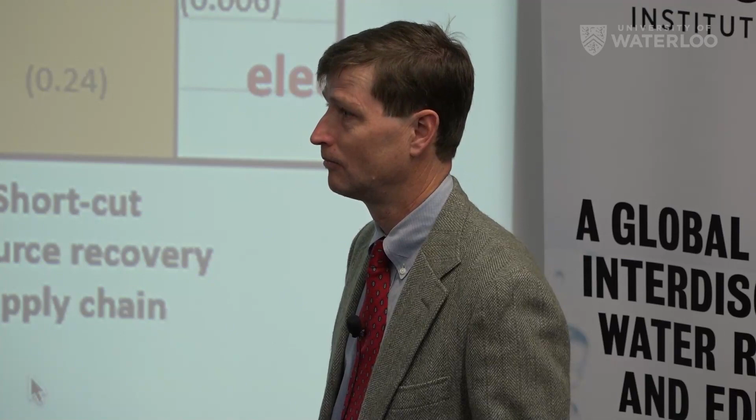I work in mining and mine water, which is quite different, but very high sulfate concentrations are quite common. So I would suggest looking into some of the mining literature as well for techniques for removing sulfate from water. Thank you, Kevin.

Last question. Another economist. Hi, my name is Ahmed from the Department of Economics.

My question is not about the chemical part, because I try to get used to and understand what you have explained. But assuming that the regulators accept such a circular model rather than the conventional model, first, how long does it take to implement such wastewater treatment centers, and second, what will be the length of the return on investment? Because here we have the net benefits, but it will be costly to implement such treatment centers. Do you have any estimations, or maybe you have not?

I'm not an economist, so this will be more of an opinion, hopefully an informed opinion. The first plants, the Orange Counties of the world, had to put in a lot of effort to get over the regulatory hurdle. Now things have changed, since they've been operating for almost 50 years, so it's more standard. It's almost like there's a go-to permit.

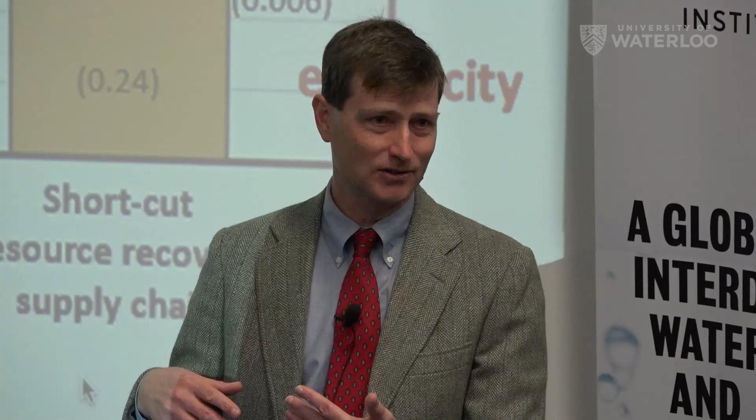But why do that? It's a lot of money just for golf course irrigation. It's really about bringing school groups in to show them how fancy the process is - here's your original brown sewage water, and here's this - well, that's not water, but clear water. And actually, in Orange County, you can drink the water at the end of the process. They've bottled it, and you can sample it right there, so the public gets comfort to help speed the process through.

Where the delays happen is places where you want to do something new, like this direct potable reuse directly into the distribution system.

But California, realizing that droughts are the thing now, the governor is basically forcing the regulators to move fast. He combined a bunch of agencies, because part of the problem was you have one group of people who deals with wastewater plants and a different group who deals with drinking water plants. How do the two get together and make a reuse system? So he took a whole bunch of separate agencies, smushed them into one, and gave them firm deadlines - this isn't an if, it's a when you're going to come up with direct potable reuse regulations. And what happens in California, other places, I won't say always adopt, but frequently adopt, so that they put in the effort and other people learn from it.